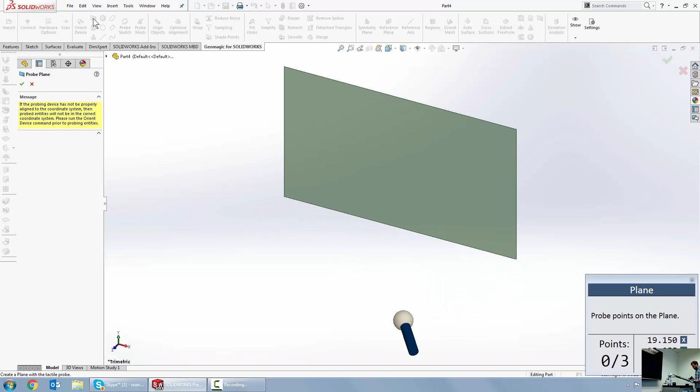and what I do is I probe 3 points as the console here tells me, and then accept with usually the left button, the way that we have it set up. Some people actually have the right button as the accept button, but either way it's 3 points using the trigger, and then either left or maybe right, depending on how your RDS is set up, will accept that geometry.

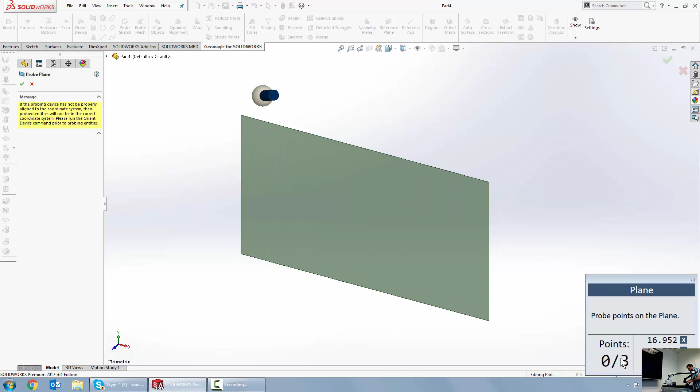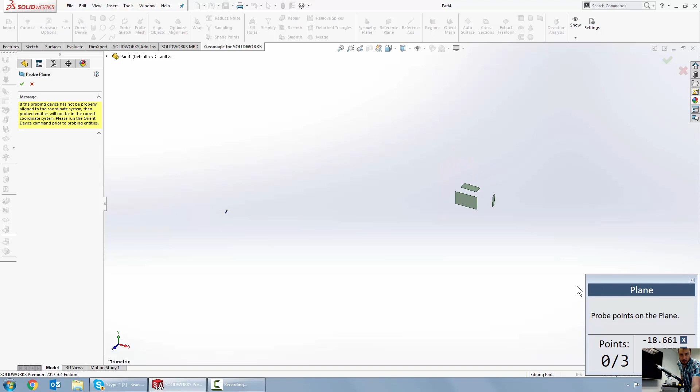Once I build the first geometry, I can probe the next one. And I'm not limited to 3 points. If I need a more accurate fit, I can still probe 4 or 6 or however many other points to create the plane of best fit. When I'm done with those geometries, I can accept, and I can move on to something else.

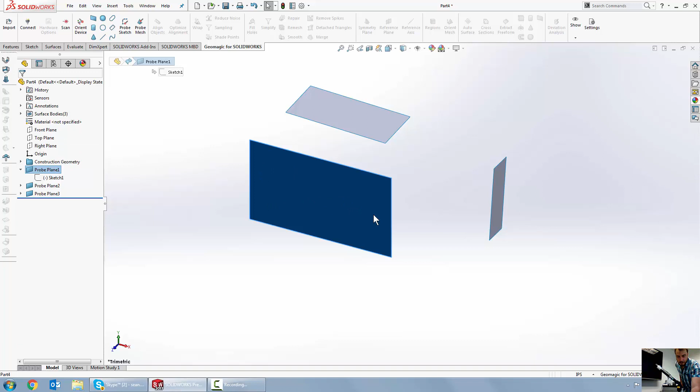Right now, these probe planes actually come in as surfaces. So they build as a sketch, which is the bounding sketch here, and then essentially a boundary fit surface, or a fill face command to fill that bound surface with the sketch entity. And I can right click that sketch. Just like any other sketch inside of SOLIDWORKS, I can extend, drag these up to resize the surface, and they will become larger.

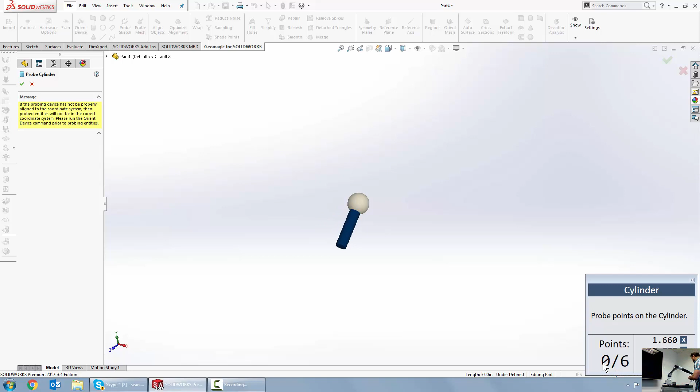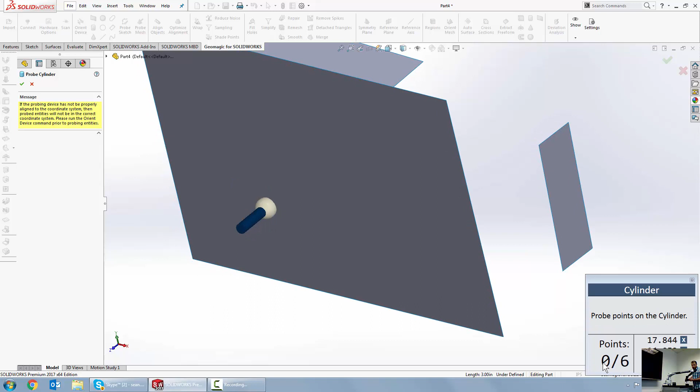Cylinders work in a similar fashion, except I do need 6 points here and not 3. I'll probe one of my large side holes here. Again, not limited to just 6. Now we do need to pay attention to compensation direction here. I need to make sure that I'm accepting my geometry inside of the geometry, as there's no stress or strain detector on these RDS probes. Just like those planes that we created before, once I accept, it'll build me a circular sketch and a surface geometry.

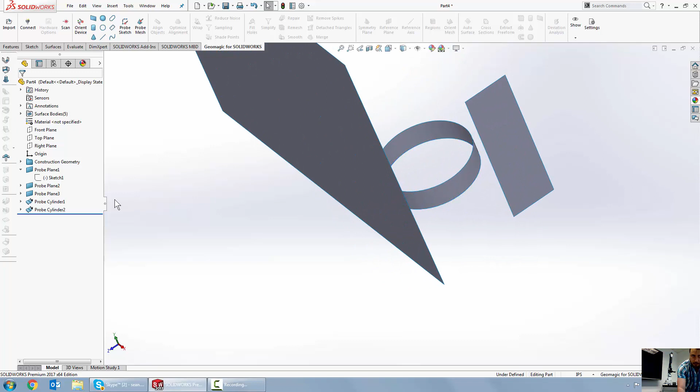I'll go ahead and hide all of those. And everything else works about the same. I can do circles, I can do lines, cones. Any 2D feature will come in as just a sketch. Anything else will come in as a surface body. I can also probe sketches. Basically this asks me first to probe a plane to put my sketch on, and then in the second mode it'll actually allow me to probe those sketches. So I can do lines and arcs here.

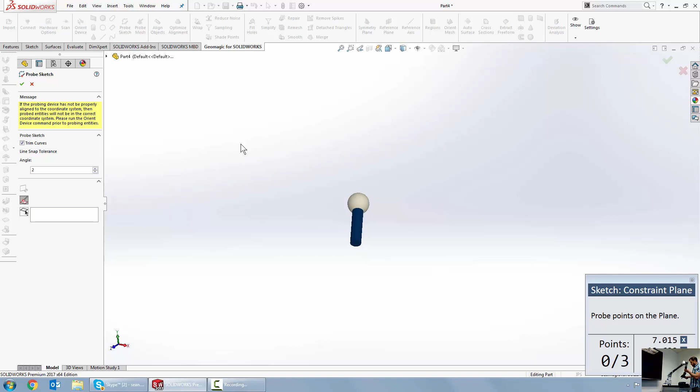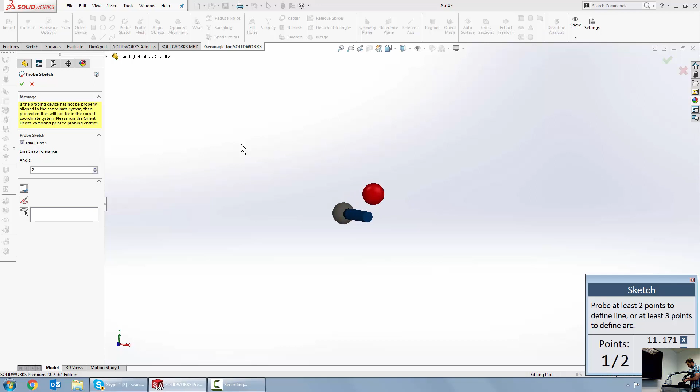Grab my large part. I'll create my plane. 1, 2, 3 on the top. That's my sketch plane. And then the console asks me if I want to probe lines or arcs. I'm just going to do the perimeter of the top surface here. This will all be projected back onto my top plane. So I do 1, 2, 3 on this back side to create an arc there. I'll do 2 right here, and you see that it starts to connect the dots for me. Do 2, line.

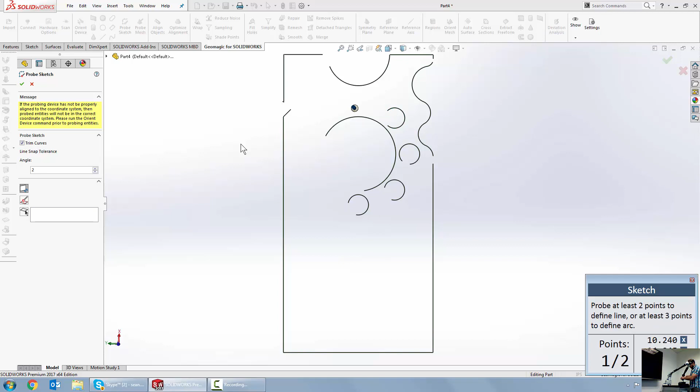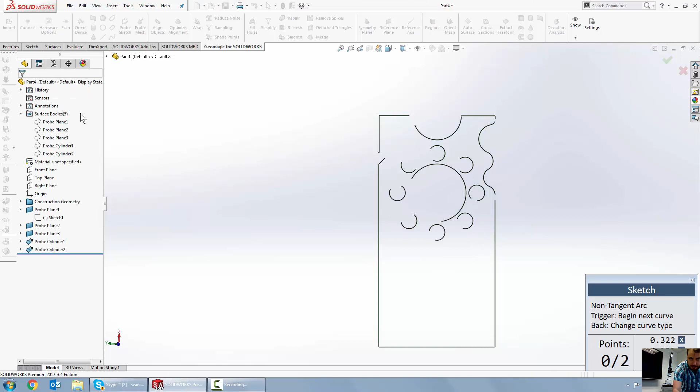So with the probe sketch, you see that this is good for creating things like the profile, but it's not filling in these circles. For that, I would prefer to use my probe cylinder rather than trying to probe this as a sketch. But either way, I can still see the top of my Hexagon artifact clearly. When I accept here, it builds me a sketch, and I can always go back in and edit that sketch if I need.

Change the position of a few things. If I make a mistake, I can always delete that object. I can start to connect the dots here, connect these lines, and start to reverse engineer that way. So I don't actually need my scanner to be able to create cross-section sketches.

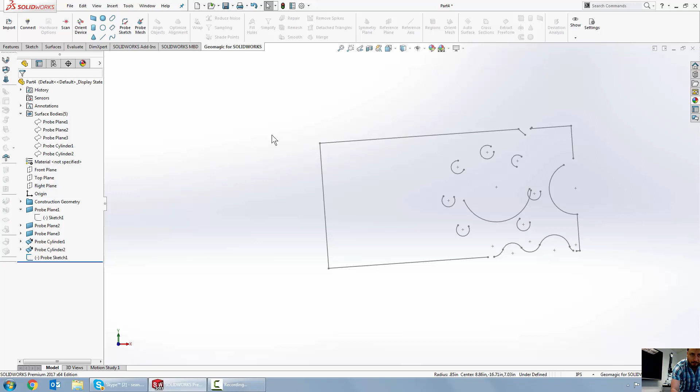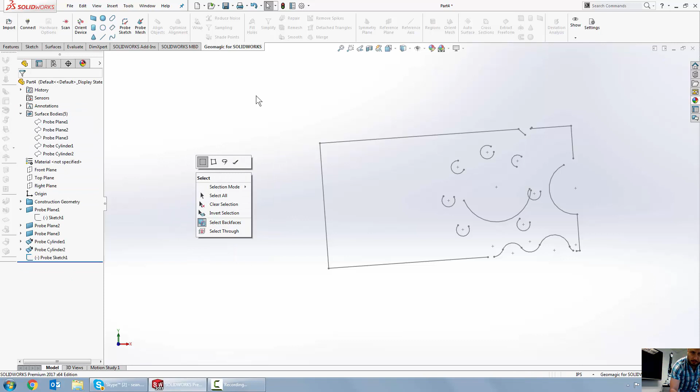I can also use the Orient Device tool. The Orient Device tool asks me to probe geometry first. So what I should do is actually not open this up with no construction geometry created, but I can reuse geometries to build my coordinate system around. So right now I can see that my part is not square to the world when I'm using the standard SolidWorks front, top, left, right commands.

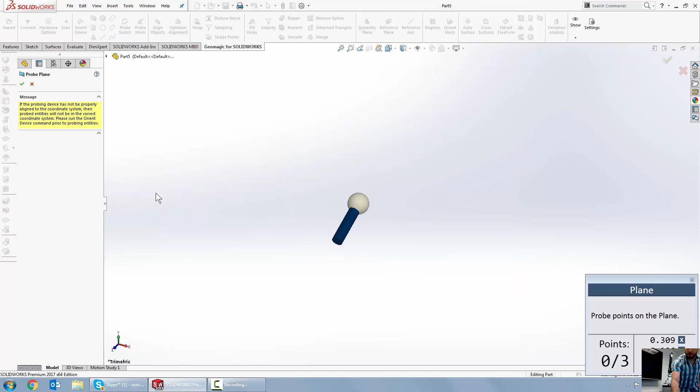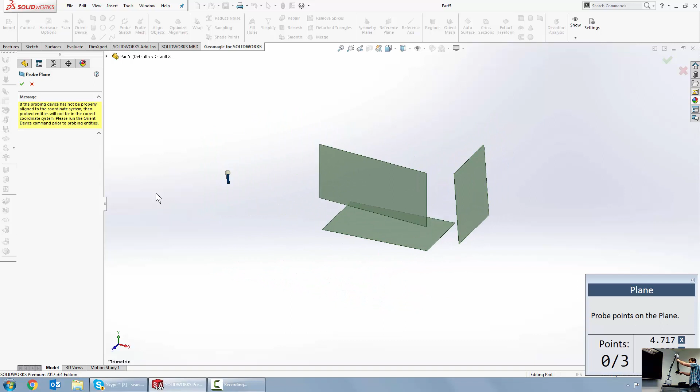So what I'll do is start a new file here. And I will pre-align my part before I take some scan data. So I'm going to use my plane tool. I have my 3 planes there. I know when they get built that they are not going to be aligned to the world perfectly. So I can verify that by